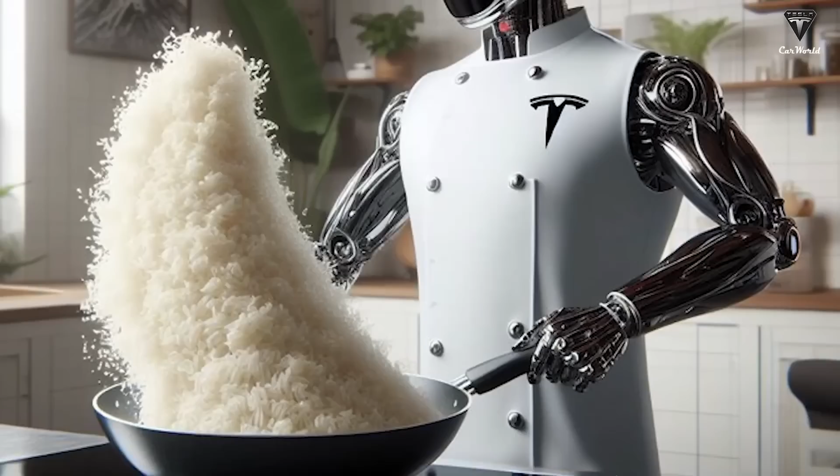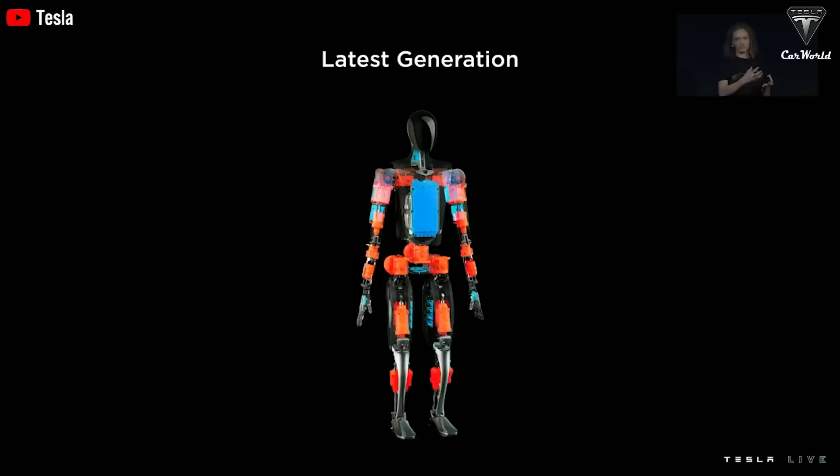We've now heard from Tesla some additional groundbreaking news about the Tesla bot Optimus. Elon has now confirmed that Optimus is doing simple factory tasks, albeit within the lab. He also said he expects to have a limited number of bots in the actual factory by the end of this year. And the most important news is that he expects to be able to sell externally to customers by the end of next year.

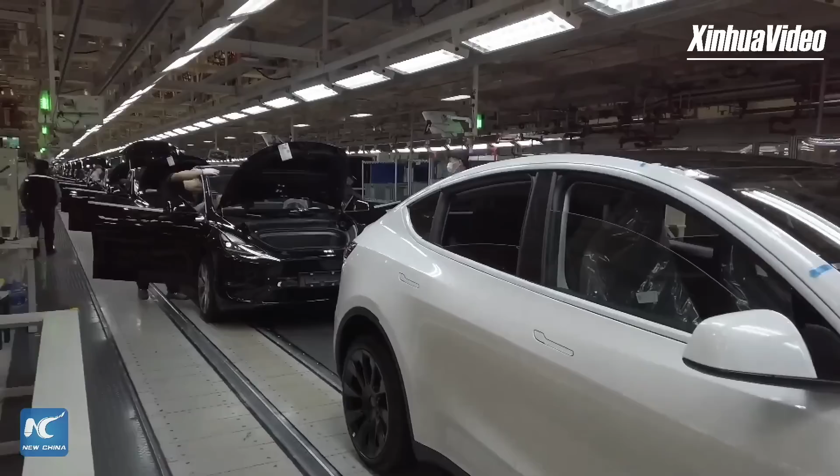Today we have Scott Walter joining us, and he'll be showing us videos of the factories in both Tesla's Giga Shanghai factory and BMW's factories to see what kind of tasks Elon is referring to. Scott is an aerospace engineer with a Ph.D. in mechanical engineering and has co-founded two robotics companies.

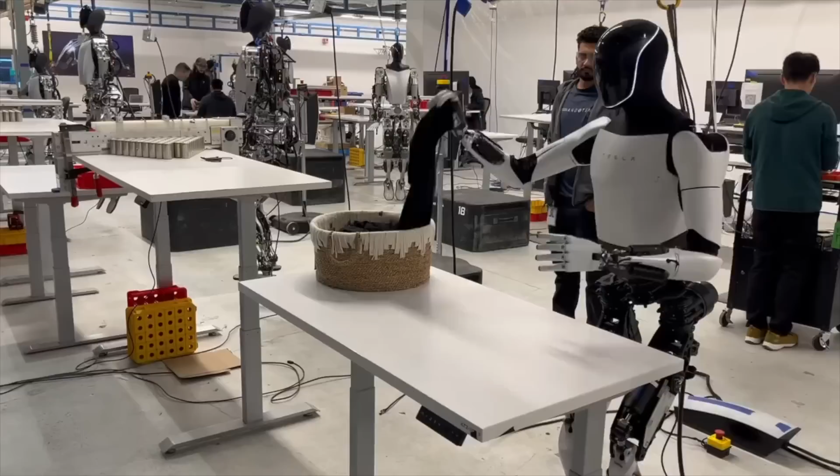We're getting to the nitty gritty. So in the earnings call, Elon said this: the robot is currently doing simple factory tasks, albeit in the lab. We do think we'll have limited numbers in factory by the end of this year, and we may be able to sell externally by the end of next year. What were your thoughts? Did you think that was good? Was that ahead of what you were thinking or behind what you were thinking?

I think it sounds pretty close to what Elon intimated earlier this year, that they were expecting something. Remember, he used the term products a few times, and them being able to start having products ready by early next year. So that's probably what he was already thinking about. And he already talked about it being in the factories.

But I think the other thing I want to note is, what question was that actually? It was number 2. And remember, that gets voted on by the shareholders, doesn't it? Yeah, on say. So that was a very early question to be asked, which means anyone who understands what's going on with Tesla understands the importance of Optimus.

And Elon gave us a little bit of an update, probably as much as he was comfortable doing, but at the same time gave his kind of standard answer at the end: just imagine how big a market is that when you have a robot that's sentient and is able to understand and operate in the world.

Then he gave a couple other hints in there about why he thinks they can scale, how they will be the ones to be able to do it, and some of the problems they think they have unique solutions to. But it more or less says we're on schedule, that they're going after the low-hanging fruit right now, doing simple tasks. They're doing it in a laboratory setting, which I was sort of expecting they'd be experimenting more on the actual floor, but it sounds like they're probably able to take some of the tasks they're looking for and duplicate them well enough in the laboratory.

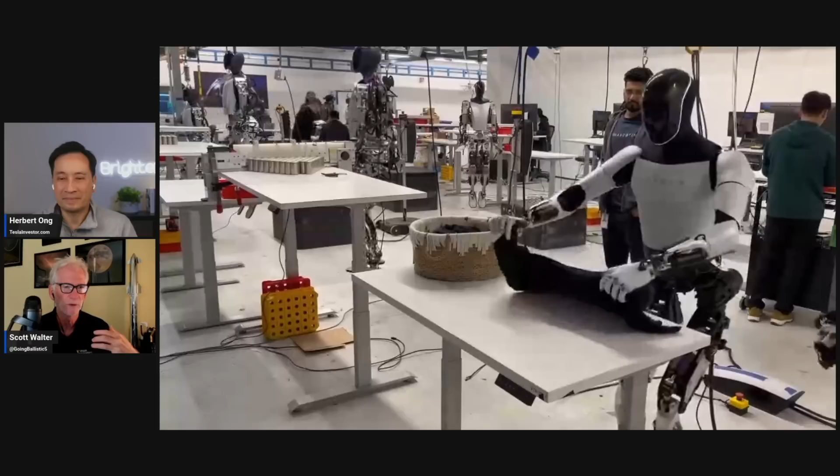So this is an example of part of the laboratory. We're not seeing all of it, because I think in one of the videos there was a big curtain up, which makes you imagine there's probably more going on back there. So they're doing a lot of the training and learning for the bots here, understanding what their capabilities actually are. And clearly somewhere they've probably mocked up or set up some workstations to do what will be simple factory tasks.

Now we've talked about some of these tasks in the past. Yeah, let's do that, and we're going to show video of what they could be, and go right into the factories. This is in the lab. This was teleoperated — there's a human here off camera. But we saw that there's workstations, workbenches, tables, right?

And then there's 4680 batteries here, and also behind as well, so they're learning how to do this. And this particular demo was just to show that the form factor of the humanoid bot is good enough that the hands and fingers are able to manipulate a shirt. If it can manipulate a shirt, it can do everything. But you can see that it's also testing this.

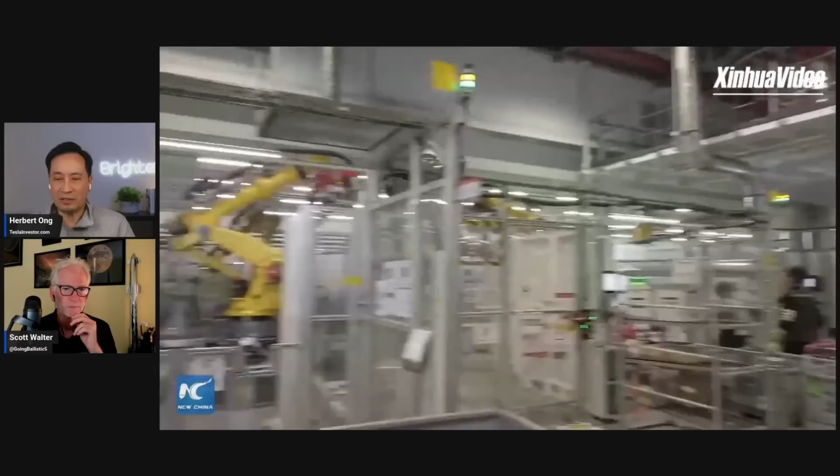So let's go right into Giga Shanghai. This is a video of Giga Shanghai — tell us what we're seeing here. Yeah, so this was a nice run-through of this factory where we get to see some of the typical operations a human operator is expected to do. This is a typical loading of parts into a robotic welding cell, something Elon had mentioned before. You see you're picking up two simple pieces of sheet metal, and you just have to drop them in a certain location.

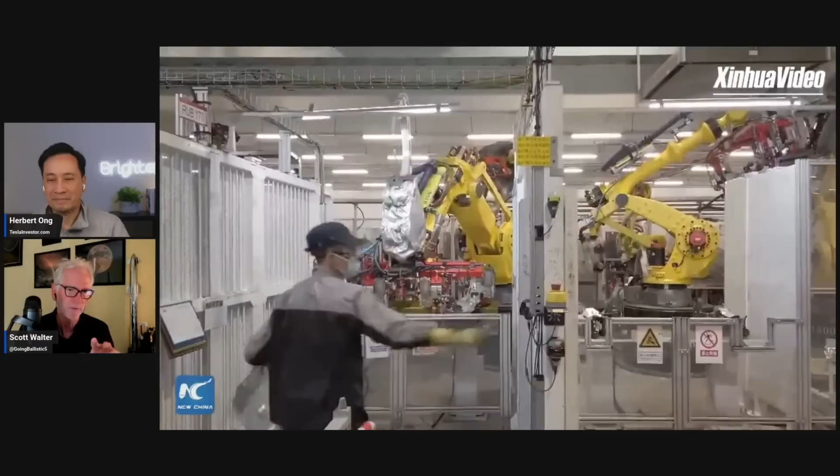It's not difficult to do that. Then you have to push a button to let the robot know the loading is complete and that you're out of the cell. He accidentally walked into the cell too early, so you see there's a safeguard, and he has to reset the cell to make sure the robot completes that before he brings the piece in.

In the first case, he was able to grab two small pieces at the same time. In this case, the two pieces are a bit too big, so they decided they have to do it one at a time to bring it in. That's done repetitively again and again.

You see other examples of loading or possibly unloading parts in different stations, and they are very simple tasks. These are the low-hanging fruit we've talked about that are repetitive and very easy, yet for some reason really hard to automate.

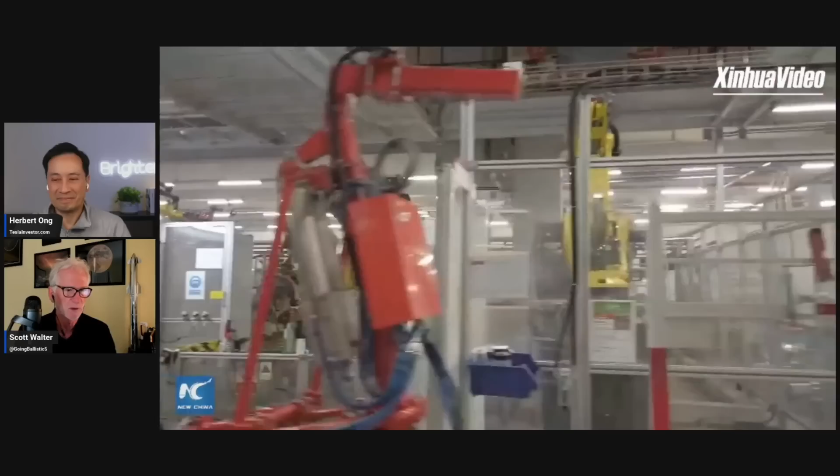Part of the reason they're hard to automate: the robot is picking up a part to bring it over to the station where something is going on. They want that part manipulated and brought to the big robots, but you don't want humans near that because there's stuff moving around and you don't want them to stop the operation. But for that robot to pick up the part, it has to be in a precise location, which is why they have those fixtures to drop them down.

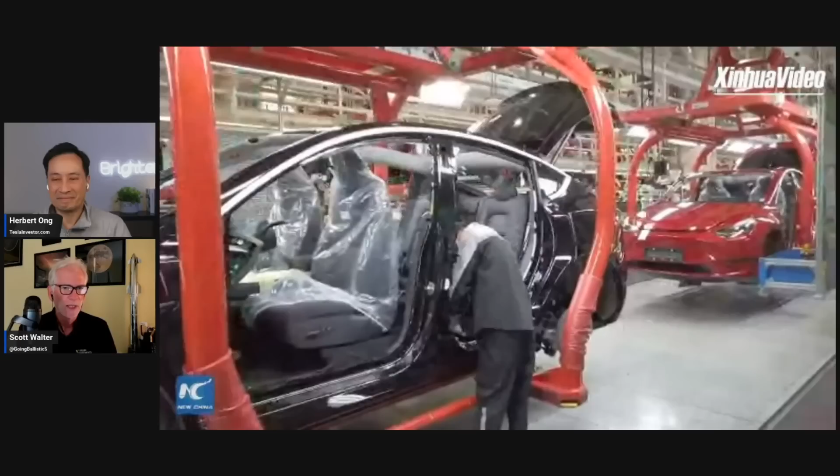Those parts come out of bins in a messy order, and it's really tricky to just pick them up and pull them out. So it's a lot easier to pay a human to do it than create the automation cell, because if they could create it, they would have by now. Ironically, humans are being used to feed the robot, so that robot can then feed the actual cell. That's something that would be very easy to replace with Optimus.

Now we see other examples going on here, which may or may not be that easy for the robot to do right away. Some of that might be just like inspection and going around. Some of these may be low-hanging fruit, some may be a little bit higher up and something you'd have to wait for. These are not the simple tasks.

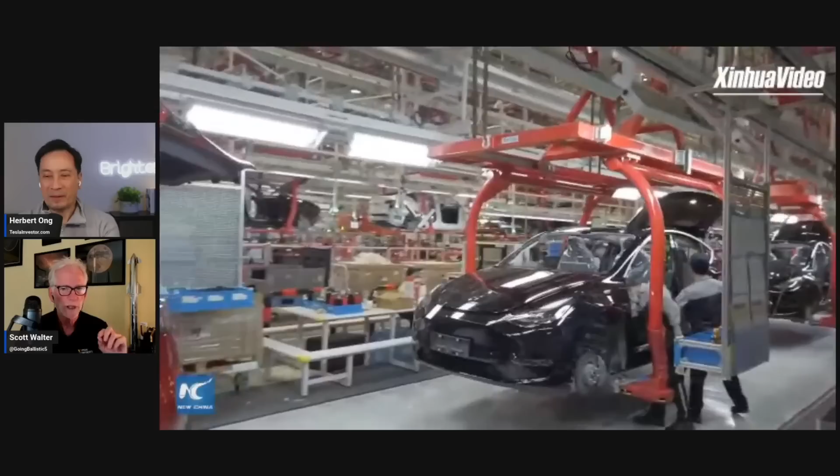Typically when you automate, you want to automate things that are stiff and don't move on you, like sheet metal. When you start getting to these soft, fabricy things, it's a bit harder to automate. But we've seen Optimus able to fold a t-shirt, meaning they're thinking beyond just rigid objects.

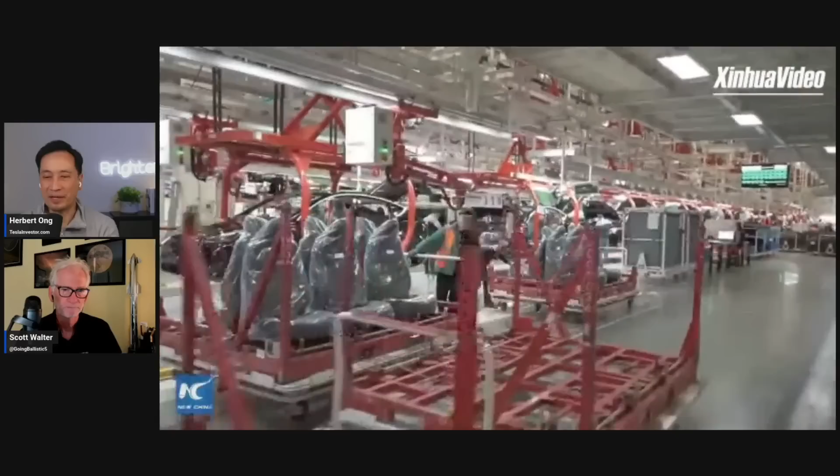For a second here, you can see there was this kind of blue plastic that the guy was managing, or even pulling the plastic off of those before they go in. There's all sorts of operations, hundreds and hundreds of them, that could easily be automated using a humanoid bot.

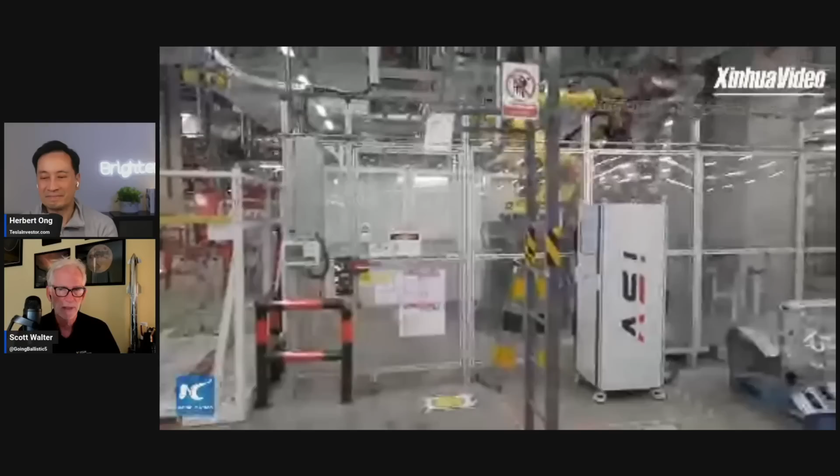This sounds like by the end of this year there will be limited use in production. I'm pretty sure what was meant was not production of the bots, but actually being used in production on the floor. I keep thinking it's most likely going to be the S and X lines, because their volumes are a little lower and it might be less risky to implement there. But I could be wrong.

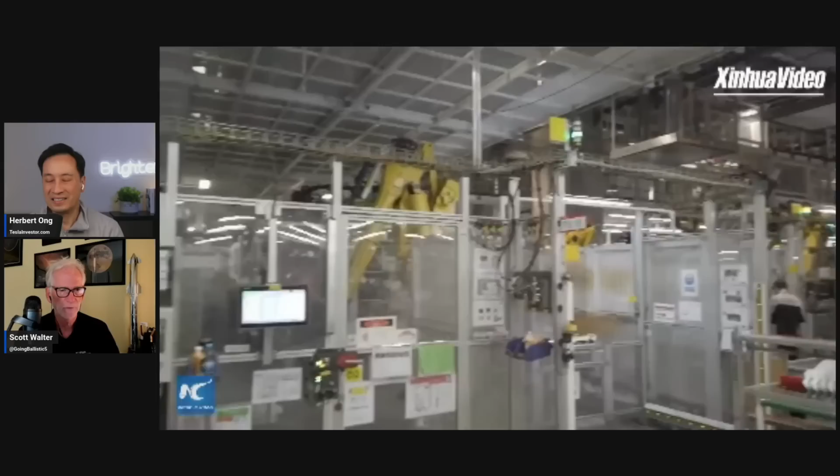There were statements about the next vehicles, the new vehicles running on the existing lines, and they should be getting a certain amount of efficiency out of that. I wonder if part of that retooling involves thinking about whether they'd be able to do it with Optimus to help drive those costs down. So they may be thinking a bit more about it.

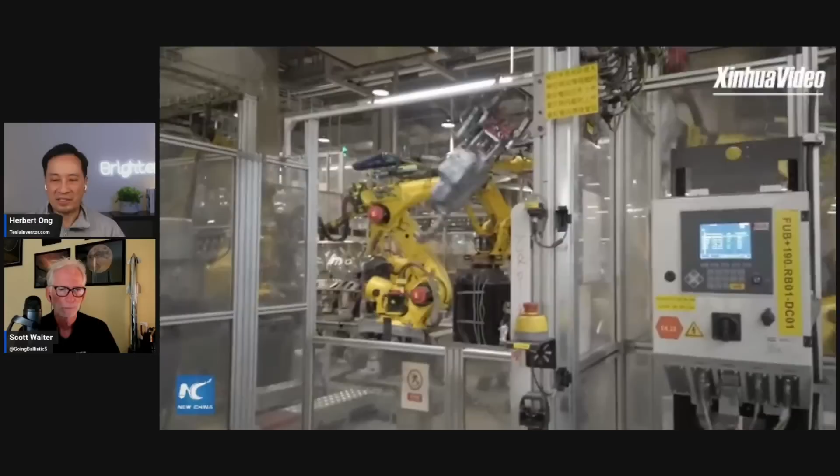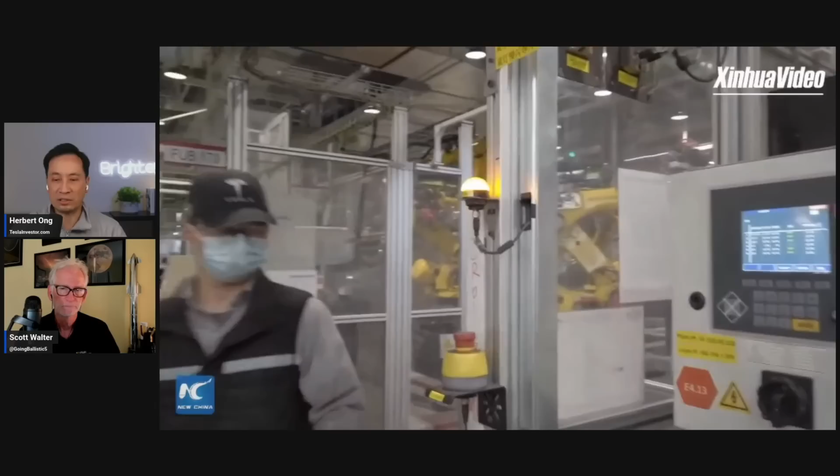Just completely replace him, the way it is now, no need to change anything. But eventually, they could even redesign this and get rid of all of this. Yeah, it's not as big of a deal.

Rather than a human feeding a bot that then feeds the other bots, you just have the humanoid go directly to feeding that cell and get rid of that intermediate step. Also get rid of all these safeguards. You've got light fencing and everything else to tell whether the operator is even within a meter of that fixture. So that light fencing is outside.

And that's what we saw earlier, how easily it was for the operator to break it and it stopped, because that's a safeguard and he wasn't aware of that at the point. He thought, I got plenty of time to get in there, or it's now time to go in there, and he didn't look up to see it. Well, wait a minute, you don't have the green light, you're not supposed to go in yet.

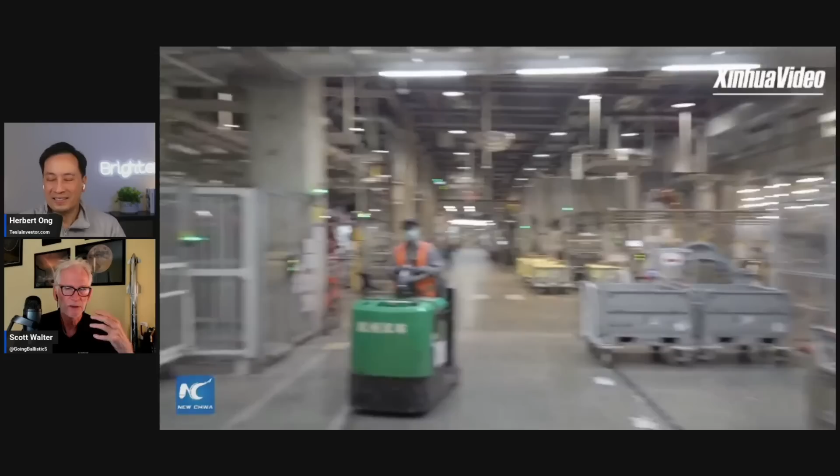And that's the kind of mistake that comes because humans get exhausted. They're going to always make those little mistakes. The humanoid won't. The humanoid is going to know, I have to check.

Right now, usually you're looking for a light that says it's clear, that you can go in and do the operation. And then when you come out, you also have to do something they call palm out. You've got to hit something that says yes, I have actually left the cell, I'm not in there right now. So it's kind of a safety clearance device, and then the other robot can go in there.

So potentially you could speed those things up. But if you look at the operations, they're not really, really fast. The operator has extra time. I mean, he had so much extra time, that's why he jumped to the other cell too quickly. And he's doing two tasks, so he's able to manage two tasks.

So if Optimus is too slow, you could put two Optimus there, one to do one task and the other task.

The biggest concern we've pointed out is that he's got to grab something, turn around, go drop it off, turn around and come back. Most of the bots we've seen are really bad at pivoting right now, not just Optimus, but others. We've seen Optimus do a curve, so we haven't really seen what Optimus is like walking away from something. But a lot of them have had difficulty being able to just kind of spin on a dime to get out.

And that's what we have to find out, at what stage is Optimus right now. Can it do the pirouette? Can it do a quick turnaround? Last week, Boston Dynamics showed their new Atlas robot being able to do it, and it does it in a very unorthodox way by using extended range of motion. Yeah, and it's very fast.

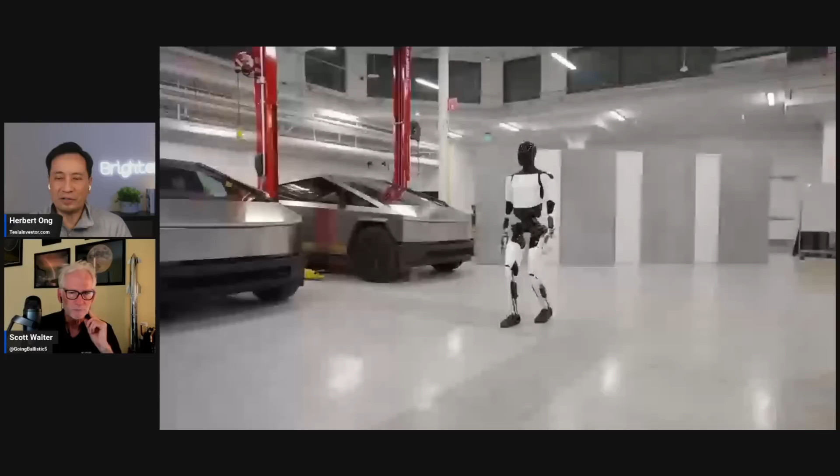I know Optimus, kinematically the way it's designed, potentially could also do that if it wanted to. The only reason maybe not is if the cables have to be adjusted a little bit to have that range of motion. Clearly it can - if it really wanted to, it can just flip its whole body around. But it's not, they just haven't optimized for it. Basically, I don't expect that to be a major issue.

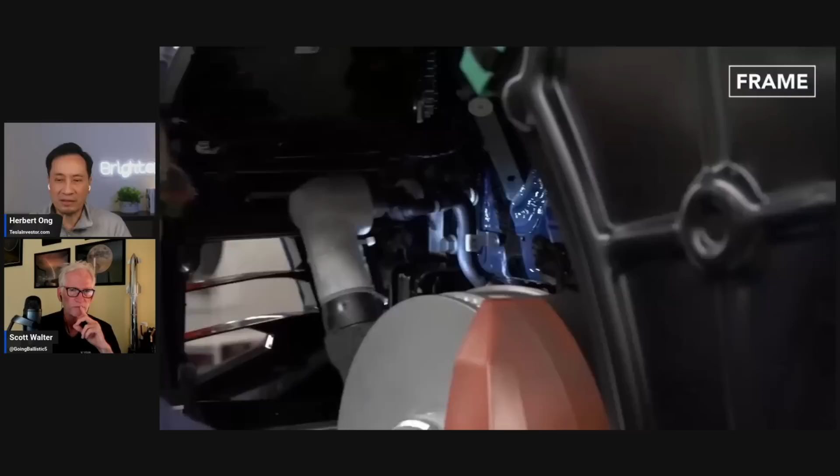Let's take a look at BMW's factory, because it's great to see Tesla's factory right there - you can see that's not fully automated. You've got lots of humans still in Tesla, but here in BMW, same thing, lots of humans. Yep, look at all these humans everywhere. Probably it's safe to say that they have more humans.

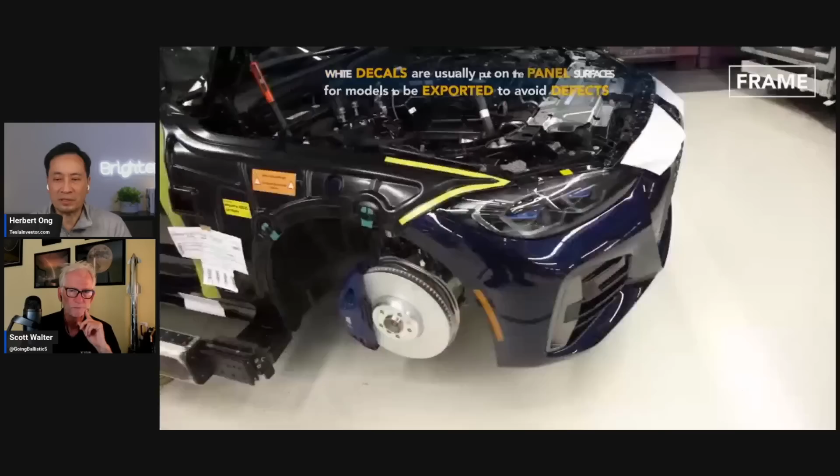Now, in this case, this is not the kind of task they'll do right off the bat, because it's unlikely that they're going to be touching the car directly. There's still so much simple factory tasks, pick and place, elsewhere outside of the car production line.

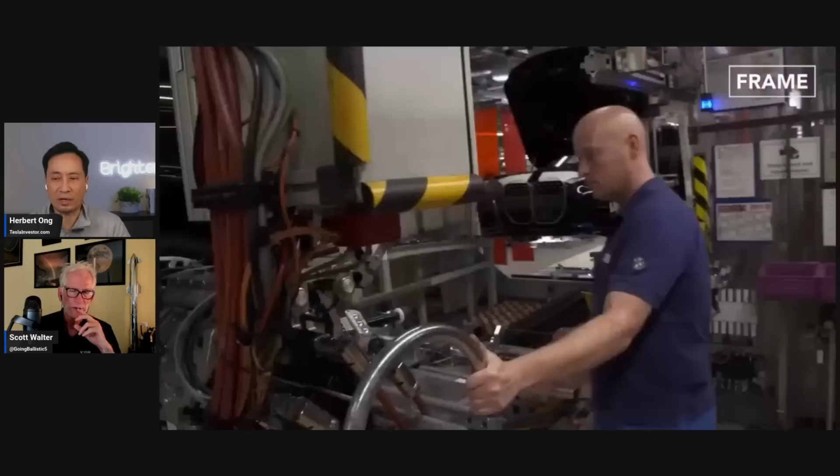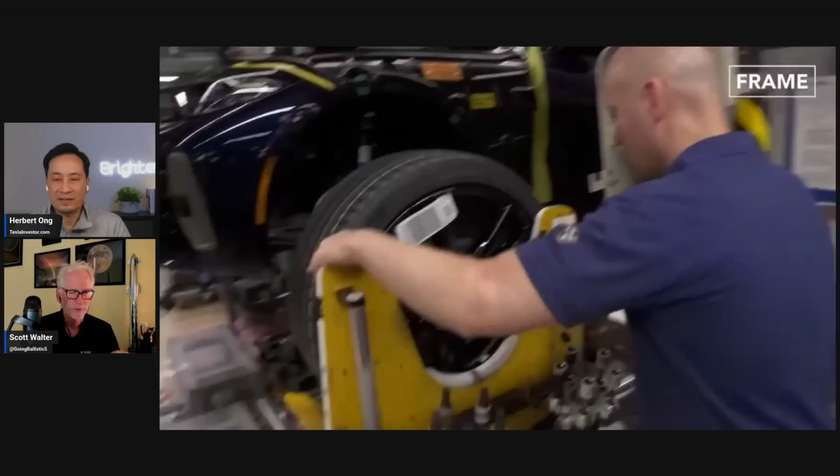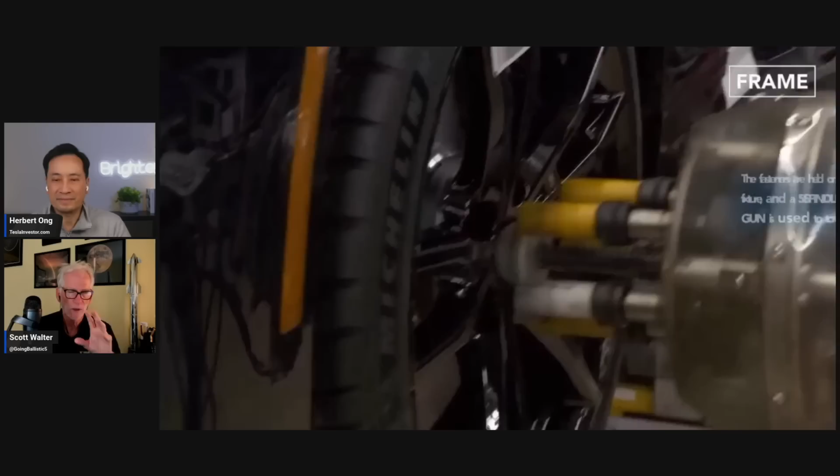Could be, yes, exactly, they could. But again, you see in final assembly a lot of these operations are fairly simple - just grabbing something from a shelf, finding the item, bringing it over, popping it into place, and then rinse and repeat. All these things are already semi-automated in a way that you still need the human to drive it in to locate it, but you have equipment to automate lining everything up, and also to make sure the object you're bringing is not too heavy.

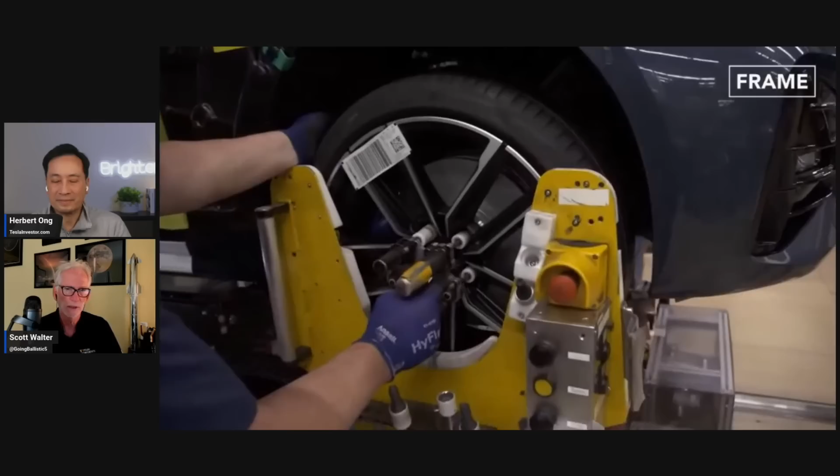So a lot of times you need a lift assist or something like that. The bots don't have to be super strong, they just have to have what is sort of the OSHA level lifting capacity. These cells are designed for people of different sizes, and these bots fit right into that class, so they'd be able to do that without a doubt. If there's an operation like that, it's not very hard to do, you can imagine the bot being able to do that.

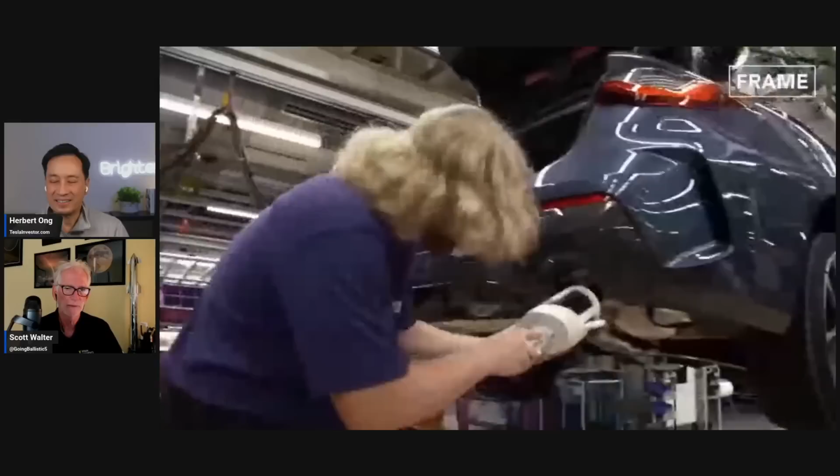So ironically, it's so easy, it looks like, well, why can't they automate that right now? But it's just not worth the effort just to pop that little thing in.

And it looks like there's a lot of activities, so if you bring in an industrial robot to do that one, it's dangerous. So you might be able to have an industrial robot do the wheels, but then the humanoid puts in the cap thing, and then there can be a working cobot, which is the whole point, right? Cobot is when a human works side by side with a bot. In this case, it could be a humanoid bot working side by side with an industrial robot.

Yeah, a different one. You're saying you called it a dance, right? They can actually be connected to each other. So you get a choreography going on, and it's well aware of what it's going to do, and knows like at this instant, you've got to duck my head, so let everything go over. So it's going to look like one of those Abbott and Costello kind of sketches.

Yep, so this is fun. When you and I got together over a year ago, we did our very first video together, and you actually pointed out we already know what the simple factory task is going to be because they revealed it on AI Day 2, or 2022. So let's watch that, because you were the first to really discuss this. It's quite interesting what they said here.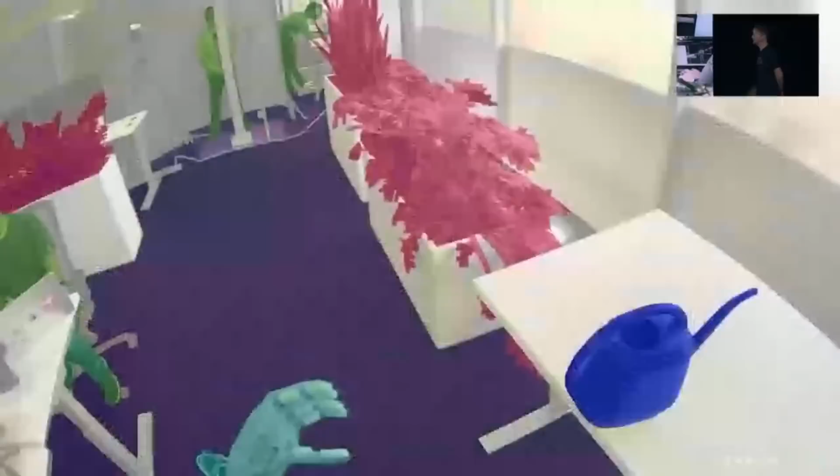Running as is, just retrained for the bot directly on that new platform. That's my watering can. Yeah, when you see a rendered view, that's the robot, that's the world the robot sees. So it's very clearly identifying objects, like this is the object it should be picking up.

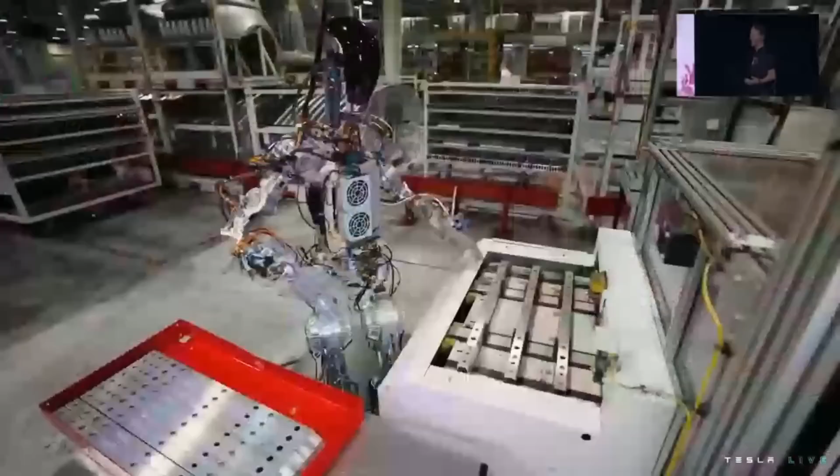We use the same process as we did for Autopilot to collect data and train neural networks that we then deploy on the robot. That's an example that illustrates the upper body a little bit more. Something that we'll try to nail down in a few months, over the next few months, I would say, to perfection. This is really an actual station in the Fremont factory as well that it's working at.

That's where they were doing initial testing to make sure the humanoid form would work, what the capabilities were, what some of the problem areas are. And already it was pretty advanced AI, as far as being able to do a lot of the development, or let's say a lot of the identification of the objects and knowing what to pick up, how to do that. Still was probably a little bit of heuristic coding, because they hadn't quite gotten all the end-to-end in there.

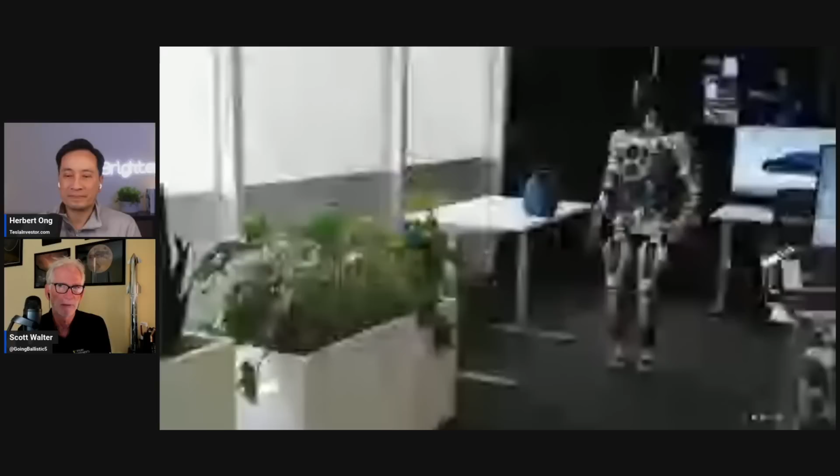But now that they've got end-to-end for full self-driving, I imagine they're doing the exact same thing now with Optimus, that they're a lot more end-to-end, because they talked about that about a year ago, that they had the first end-to-end training going and working for Optimus. And so now they're looking for more tasks.

And there's probably other tasks like that in the factory that are fairly straightforward, like unloading something, as you saw, and creating a pallet of parts that are going to be used in another operation. I think that looks like it might be a bus bar or something like that for a battery pack, maybe for the semi, or maybe for one of the other sexy models. It's sort of hard to say. It's not final assembly, but you're saying they're creating something, and you think it's the battery pack, and they just grab this and put it over there.

And it's just a simple twist. You don't need to walk too far. Yeah, and that, in many ways, that's designed to just use your torso, so you don't have to do the pitter-patter with your feet to try to move around, because it's just designed to load and unload that particular machine.

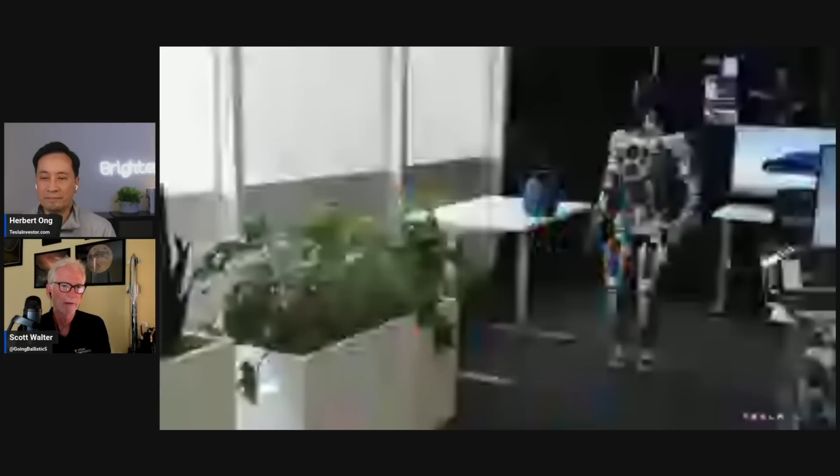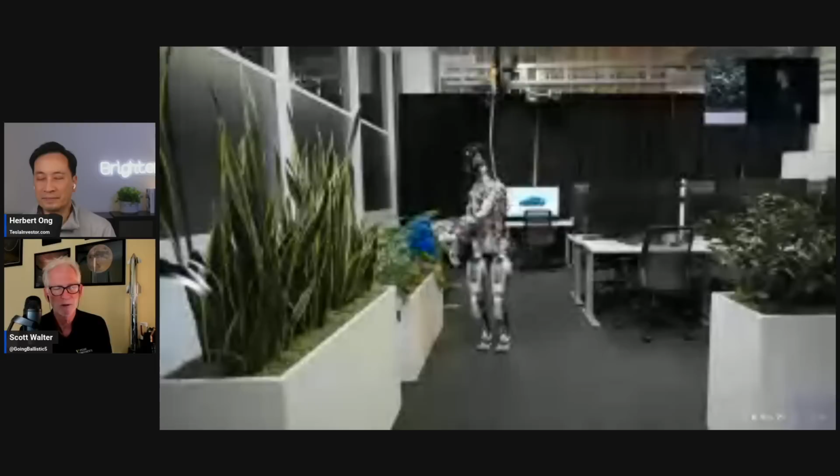And it could be one of those machines that is not high volume. It just does a certain amount of production during the day, and then you're done, which is why they may have thought, let's not even bother to automate it. In some cases, maybe you could have put a cobot in there to do it, but if it's only running a couple hours and then it's done, that's why they might have had access to it—it's not nonstop operation.

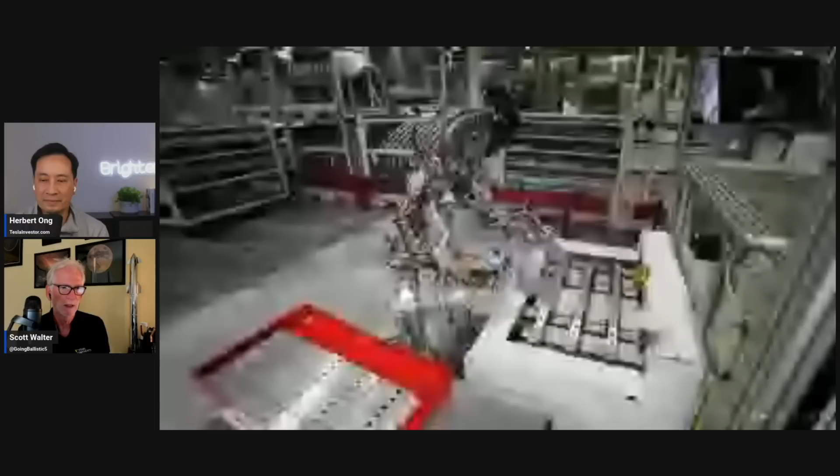But that's a good thing, because the whole idea of the humanoid bots is they are deployable, on-demand automation, whereas a lot of the other automation you have is very fixed. It's there, and if you're only getting an hour or two of operations per shift per day, it's not worth it—it has to be something that's kind of nonstop. So it might do this task, and when that's done, it goes over and unloads another machine and does another one, and you get a lot of utility out of it.

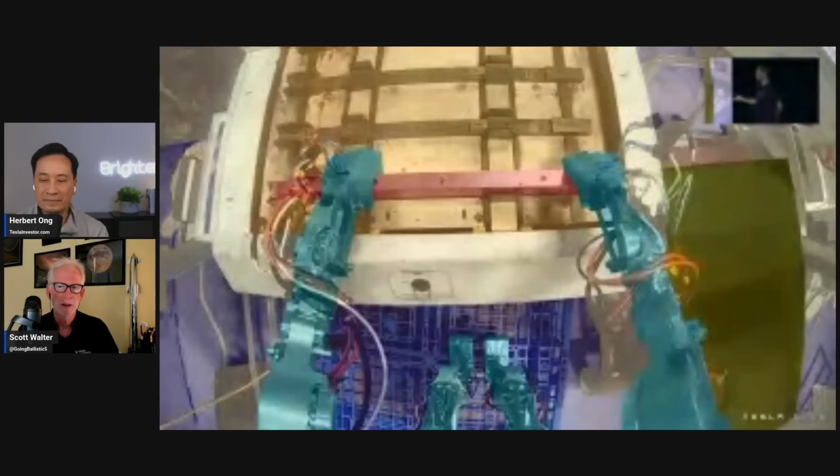So typically that's what they might be doing if they had a worker there—the worker does one task, moves to the next. And some of these may be tasks that are easy to duplicate in the lab, but you don't need the full line in the lab. You can probably take some of the old fixturing you have and a pile of components or parts, and just keep on training Optimus over there.

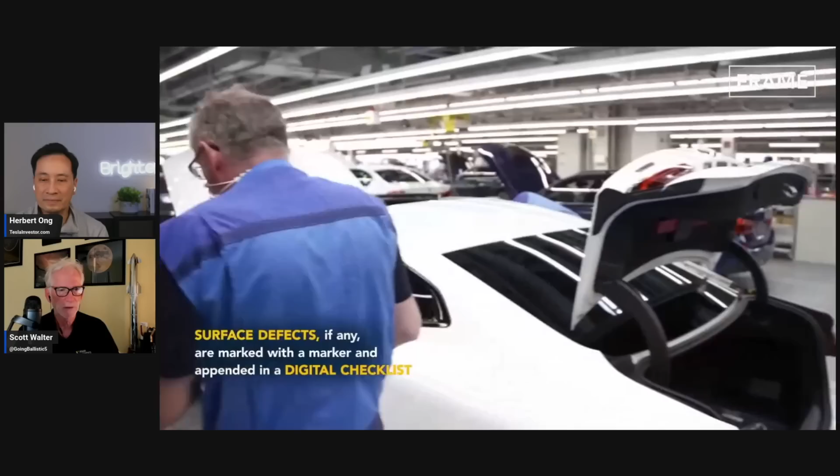So what we saw in the Shanghai video there, you don't need that whole factory line. Again, you can duplicate that in a fairly small space just to train it and understand what's going on without necessarily going down the line.

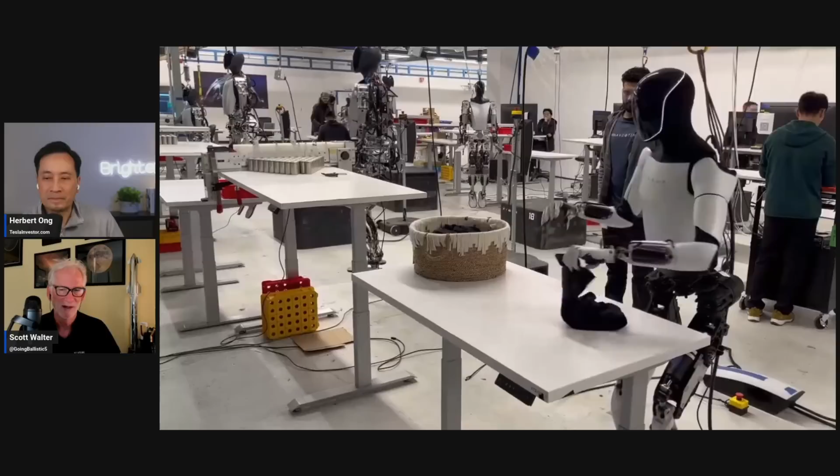And that's probably what Elon was talking about—they're doing it in the laboratory, and it may be because it's easier to make sure people aren't taking pictures and reporting on what's going on. You can control the narrative a little bit more, as opposed to having it out in the factory where it's a semi-public setting, because there's a lot of people going through there all the time.

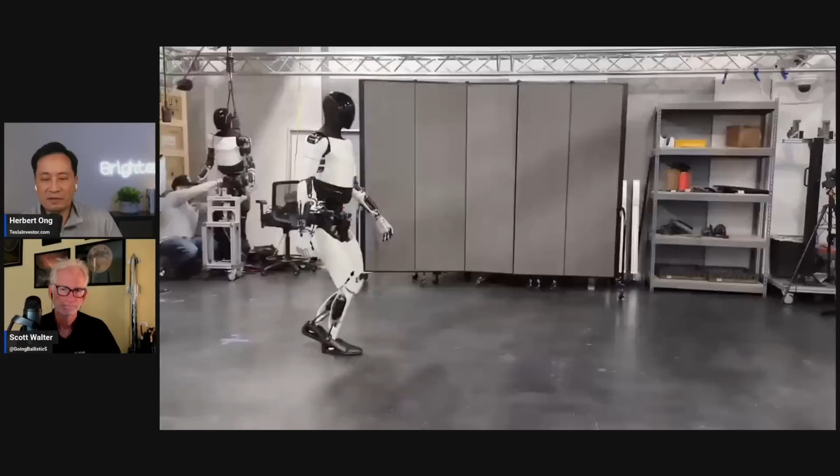So Scott, what we saw there, that was 2 years ago, AI Day 2, 2022. It's now 2024—this is Gen 2, right? That was Bumblebee, you called it? The first one was Bumblebee, yep. This one's even more refined, of course—it's closer to design lock if it isn't already. It's got even finger sensors, as we'll see here shortly.

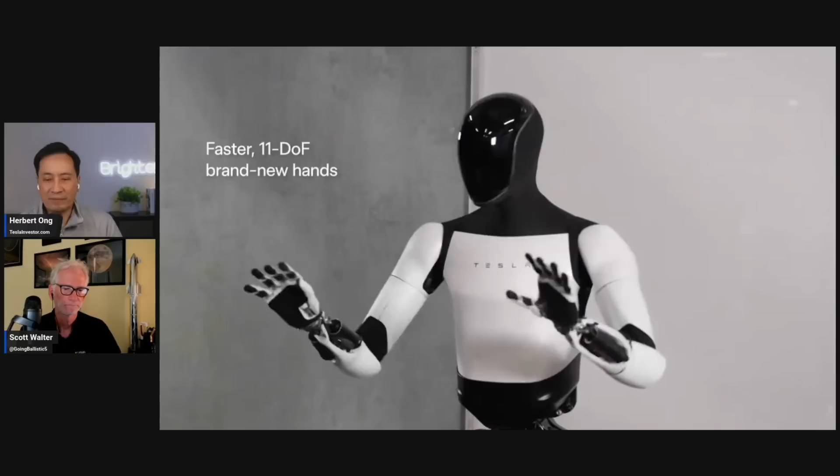And they've shown that it can actually fold clothes. So, you know what I mean—if they were able to show that already in 2022 with the ability to grab a bar, but now look at the finger dexterity that we have now. Now that we have finger sensors too, maybe the kinds of simple factory tasks might be able to be expanded beyond this as well.

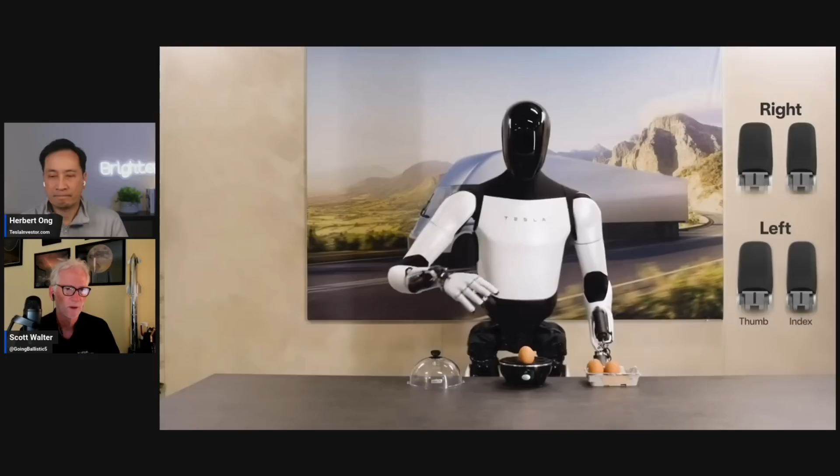Yes, so the bot we're seeing here is way beyond the bot that you would need to do that operation. As we can see, they were able to do it very easily with what was just kind of the original mock-up they were working on. And this here is a much more refined robot that can do more tasks, more delicate tasks, tasks that could require a lot more dexterity. And so that means they're thinking more than just the low-hanging fruit, but also looking at more complicated tasks.

Probably eventually they'd like to get into final assembly. Doesn't mean that that's going to be there at the end of the year, but it means they want to make sure they have a bot that they know physically has that capability, even if they haven't got the software training set quite up there yet. And it could be that there's also some things they need to improve on speed to get the functionality they want—that's something we've talked about.

Yeah, I mean, so they've shown that they can teach it—this is via teleoperation or even just watching a video—and they can then replicate the task. Especially if it's a simple task, that's something they feel comfortable saying. That's why they can say that we're going to be able to have this. It's doing simple tasks in the lab right now.

We're going to do it in a factory by the end of this year. What's the difference between that? Why is it that it'll take the end of the year? It's probably speed, right? I think it's speed and reliability.

So they can demonstrate that it can do these tasks, and then they can probably bring it down there, and it may function well for 5 minutes or 10 minutes, or maybe it's just a bit too slow. It's like, oh, it can do it, but it's not quite keeping up the line. So they are probably in the lab right now seeing what they can do to improve the speed.

Now, you've got to be very careful. One way to improve the speed is that you can just run your motors at higher power, but then that means you get faster battery drain and it doesn't last as long. So there's that delicate balance between how do we get more speed out of the system without drawing too much.

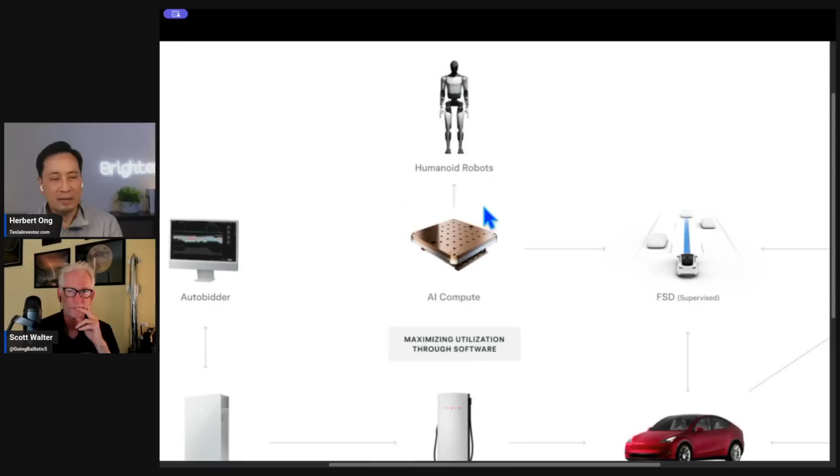So let me show this, which is a table that they showed at the shareholder deck at the earnings call, and they talked about that. The Tesla ecosystem is more than just vehicles, and this is all the things that Tesla's doing. Of course one part is the humanoid bots, but they're using AI compute, then of course the FSD, and then the batteries.

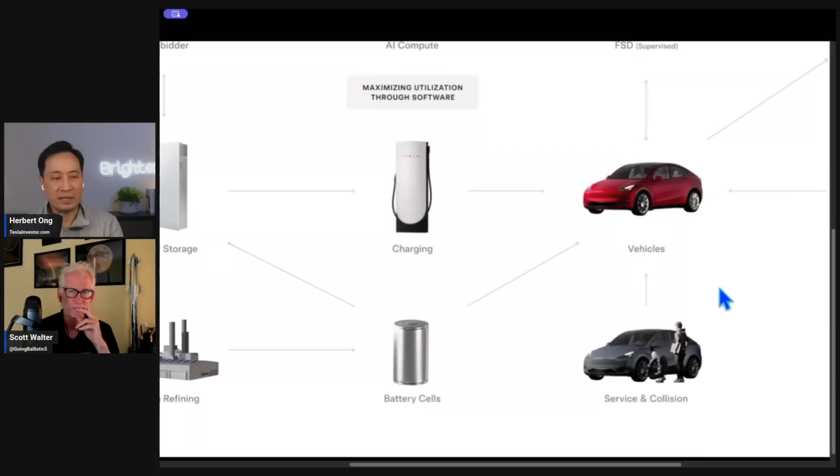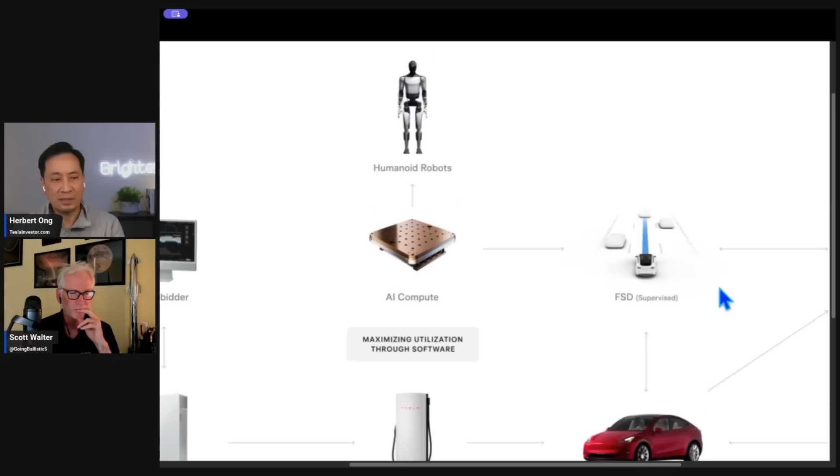So that's my point - this is one company that's doing batteries, doing the AI compute themselves, whether they buy it from NVIDIA or their own Dojo, but they're obviously leaders in AI and data centers. That's what they're doing for humanoid bots. If you look at any other humanoid bot companies right now, the knee-jerk reaction by all of us is that the one difference between Tesla and all the others is the ability to scale, because Tesla's got factories and knows how to do this. But they're also not considering the batteries, the AI compute, the inference chips, and all the AI training they're doing for FSD that's being all reused.

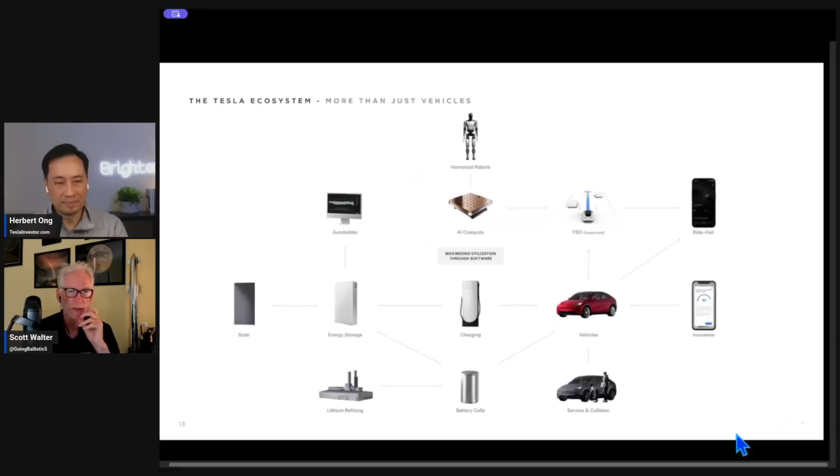All of it, yes. So they'll have very efficient batteries - batteries will be almost like zero cost as far as Optimus is concerned. And the battery management system that goes in there also - all these things are going to be very low cost items when it comes to Optimus, because it's just something Tesla is already building at scale, and they're really good at reusing a lot of the technologies they have.

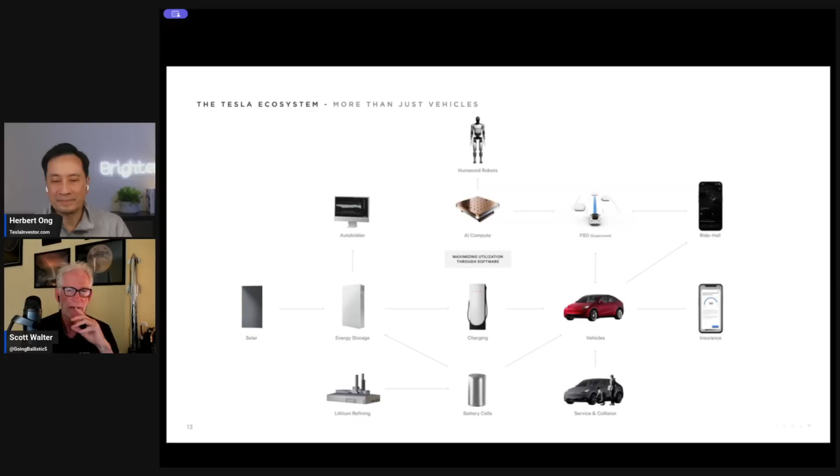The surprising thing is that the inverters inside your Tesla car, which take the AC coming from your house and convert it into DC that goes into the batteries, they just stack those together at the superchargers. That's what's in there. It's not something new, it's just like, well, all I have to do is stack these together. And you'd ask, why don't you just put it in the Tesla? Because you don't feel like putting that big stack in there. You just put a little bit in there so you can charge at home, but when you want to do something else, it's better to have that offloaded. So they're reusing a lot of the technology.

Now they might slim it down because they don't need two FSD chips on there, they can have one and a few other things. But for the most part, they're taking existing things they know how to produce and repurposing them.

And again, when it comes to FSD, they didn't talk too much about Optimus and its training, but we learned a little by listening, because everyone wanted to know more about how FSD was going. One of the first things they asked about was how much compute they have, and I think they said something like 35,000 H100 compute.

Elon didn't know what to call them, like CPUs or GPUs, because technically they're not really GPUs, they're more for training. But he said by the end of the year they'll have 85,000. So it's like, holy cow, they're adding another 50,000 on top of that.

And it seems right now he said they're not compute constrained. We're seeing that because every two weeks we're getting a new rollout of version 12, so something is definitely going on pretty quickly there. And if they get it up to that level, that means they have more than enough for this Optimus side project to have the compute it needs, as well as other resources.

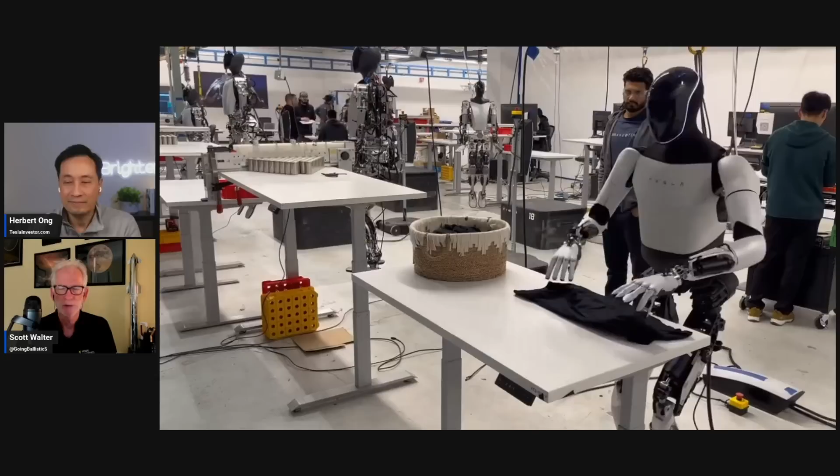4680 that were in there. It's possible because the chest cavity is a little bit different. My feeling is they probably aren't using them, because you want to reserve those for the Cybertruck right now.

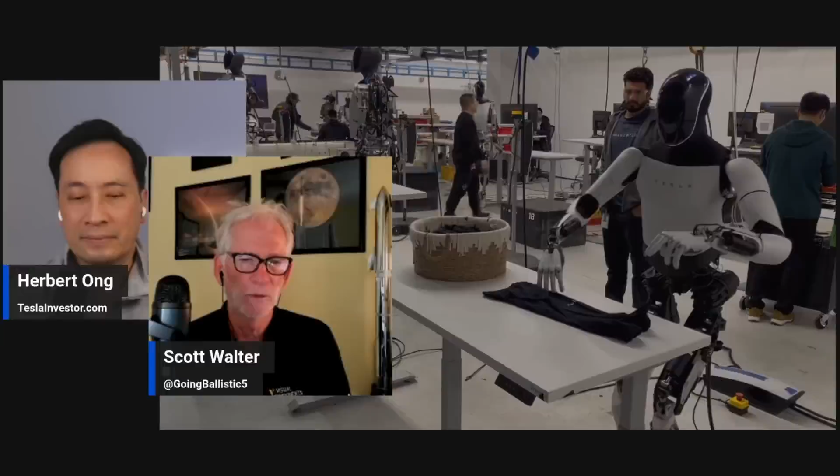But the question is, Scott, it's not whether or not the bot is using it, but maybe the bot is going to be doing a task associated with these. And you said no, right? Because that's something you can very automate. That's already highly automated. I've already seen the lines they have for stuff like that. It's already automated with traditional robots to be able to take them, sort through them, do the quality control with them, corral them together, make sure they're right. There's a lot of automation there, and then they pick them up and put them in the modules.

So they have a lot of those things, and they can do them a lot quicker than you can with a bot. So these robots will go over and pick up like 130 at a time, and just do a quick scan to see what the quality is, because they go through a testing station, and then they know which ones, and can pull the good ones out and the bad ones out. So a lot of that's already heavily automated. That's why I don't think there's something going on there, unless there's some other aspect that needs to be manually done.

But yeah, I think all of the welding and everything - you see how they weld the tabs on there. Basically they put it in there and in one shot, the lasers come down, and all the tabs are done at once. So it's not like someone going around and welding everything one at a time.

Okay, well, thank you so much, Scott. That was fun. We showed videos of the actual factory in Fremont that, at AI Day 2, they actually showed.

This is an example of a bot in the actual factory. Now they're saying they can actually have a small number, but I think the difference was that one at AI Day 2022 was just a proof of concept, just to show you. But now, when they say they're going to have a bot in the factory by the end of this year, they're talking about replacing a human, like actually working, like a hired employee with a badge.